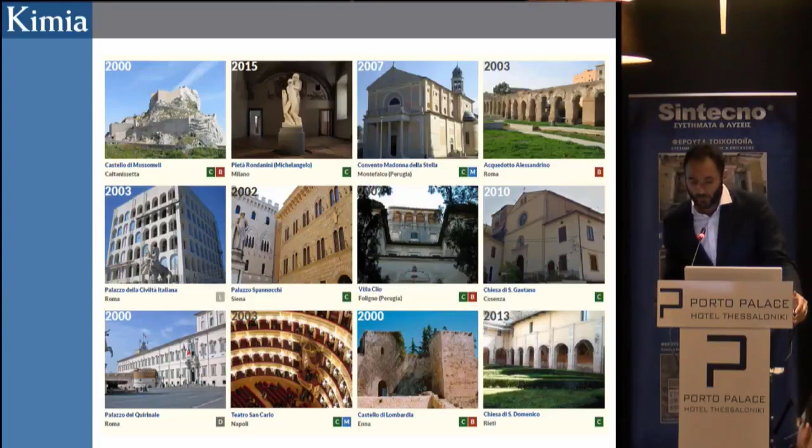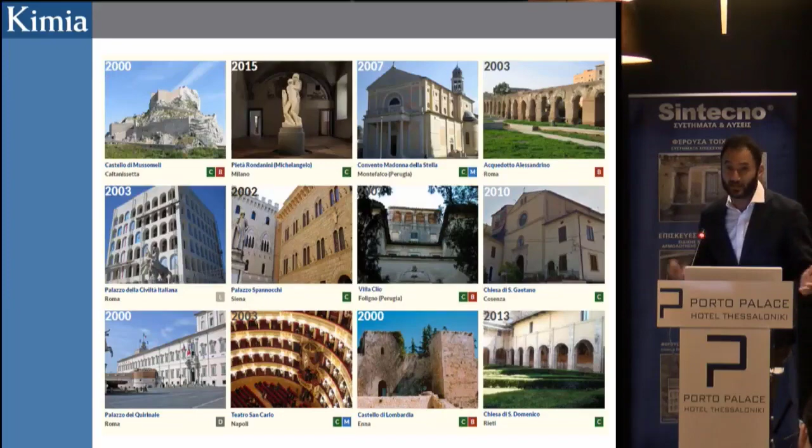So let's get started, a few words about the company. KIMIA has been founded back in 1979, and it's been specialized since the very beginning in the production of traditional and innovative materials for repair of historical monumental buildings as well as reinforced concrete structures. We have a wide range of case histories done in Italy and abroad.

As you have been already told, the main topic of my presentation is to give you an idea of practical feedback we gathered from the behavior of structures previously reinforced with different strengthening systems shown under a seismic attack. Because, as you know, in Italy, and especially in the area where our company is located, we have had plenty of earthquakes during the last decades.

So we have seen what happened with the repairs done after the earthquake which struck Italy in 1979, afterwards in 1997, and lately in 2016. We found out some interesting information about the strengthening systems applied and about the behavior of the systems applied over time.

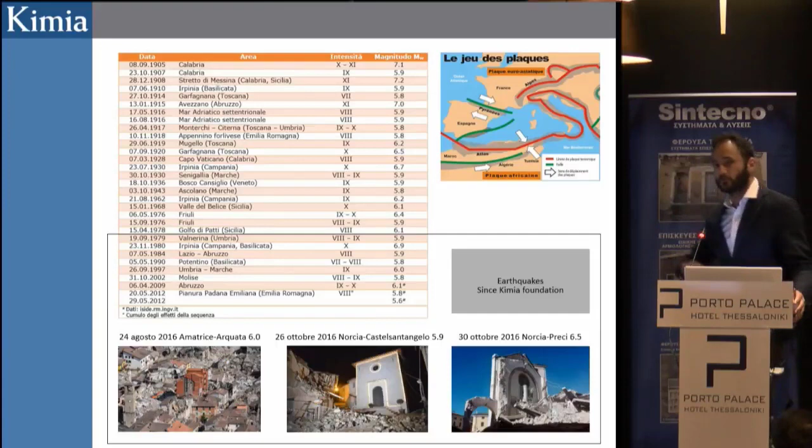Because every time we are working on retrofitting an existing building, we also have to take into account that what we are doing is not going to stand only for 5 years, but will stand in time. So we also have to take into account what will be the durability of the systems applied, and their compatibility with existing buildings over time.

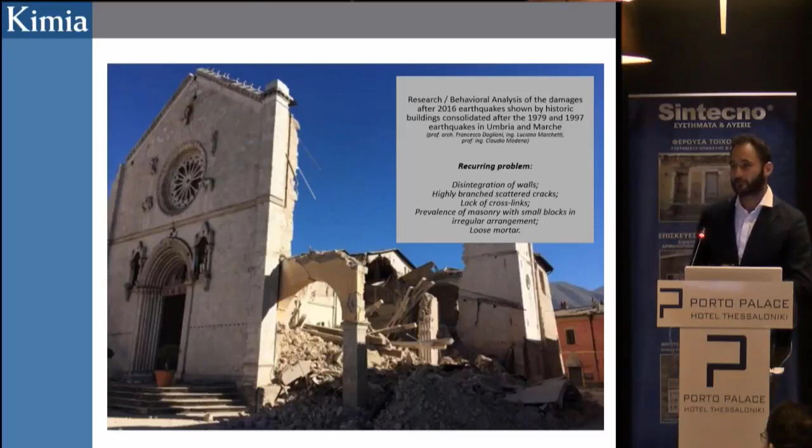After the last earthquake in 2016 in our region, we found out that there were some recurring problems, and we will go through them quickly. One typical problem we have seen has something to do with the disintegration of walls, which were actually very poor quality walls over time.

We noticed that in previous earthquakes some injections were performed, but still these walls wouldn't behave in the correct way, since, for instance, like in the bell tower of Santa Maria la Bianca ad Ancarano or in Campi in Norcia, these walls were not injectable ones. The Italian regulations were pushing a lot the use of interventions like injection for curtain walls, but if you applied these systems in walls which were not injectable, the systems applied wouldn't behave in the correct way.

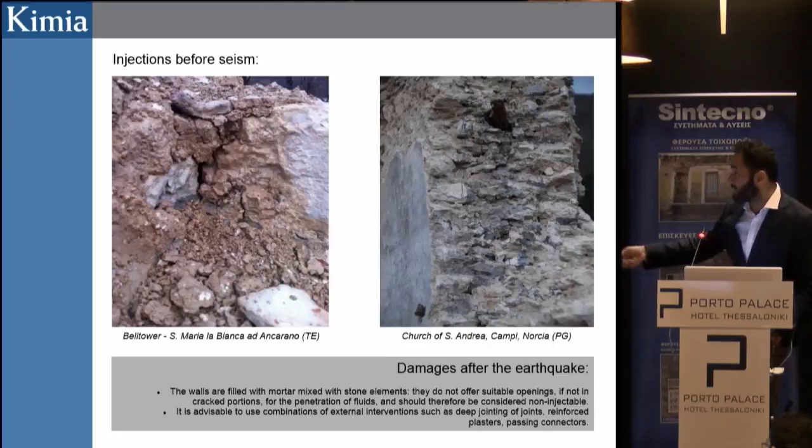In fact, you see that the injection mortar has not actually been able to fill the gaps, the voids, because the wall was not a cavity wall with interconnected cavities to be injected, so it was not injectable.

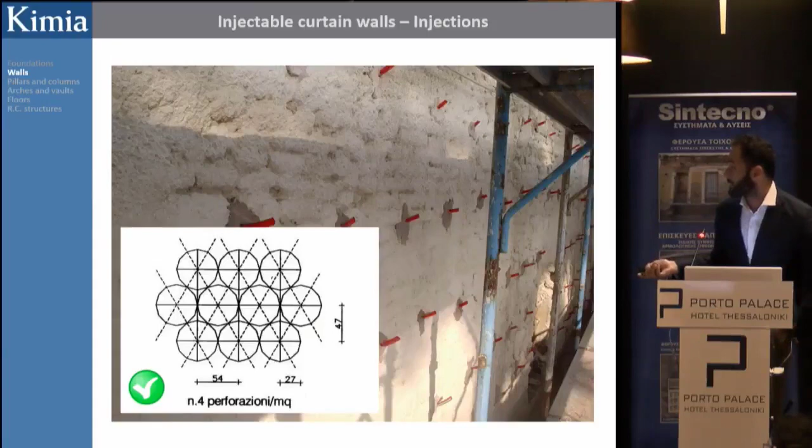The issue we had in Italy over time is that after earthquakes which struck Italy in 1979, for instance, injections were typically done also with cement slurries. And this resulted in chemical reaction with the original materials.

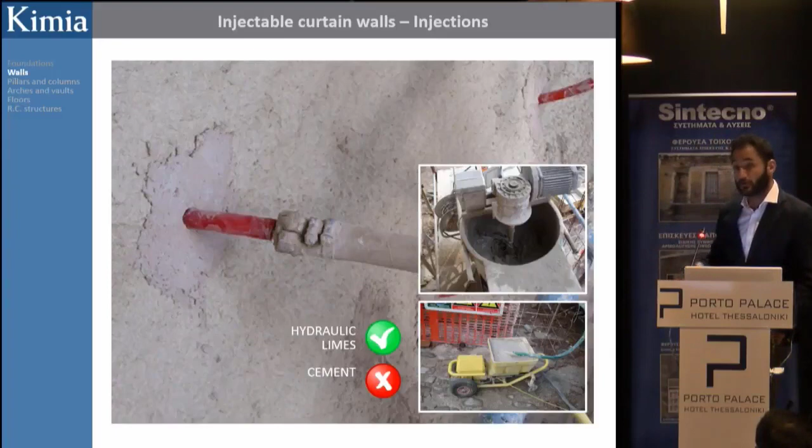So, okay, we have a problem, because if we decide to make an injection, for instance, we have to make sure that the walls we are injecting are injectable. But we also have a problem, that is to say, what is the chemical nature of the material we are using? Is that correct? Will it be able to guarantee, in time, the chemical compatibility with existing materials?

The results after many years of application, and sometimes of injection with wrong materials, were that often the cement-based slurries would react with gypsum originally contained in the walls to create materials like ettringite and thaumasite, which would have no actual strength and which would damage the original walls instead of increasing their resistance.

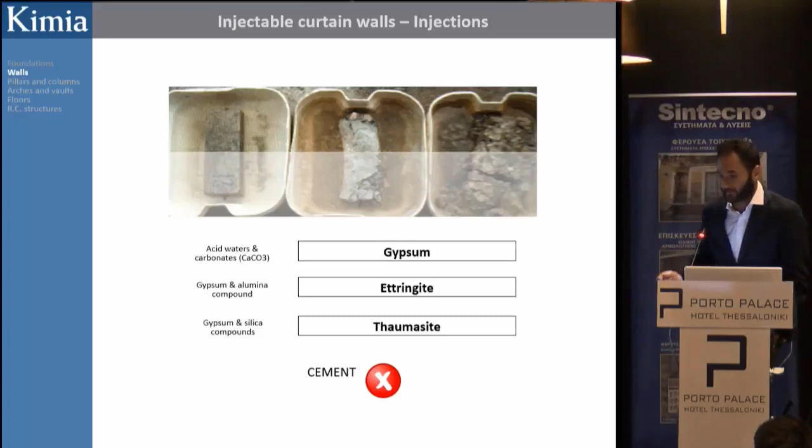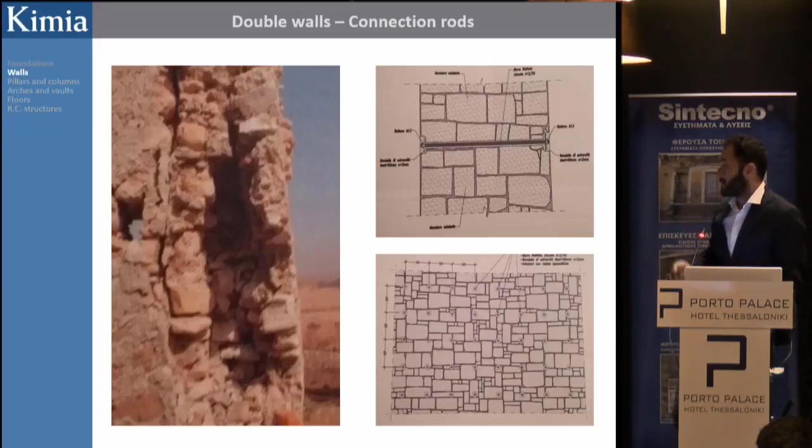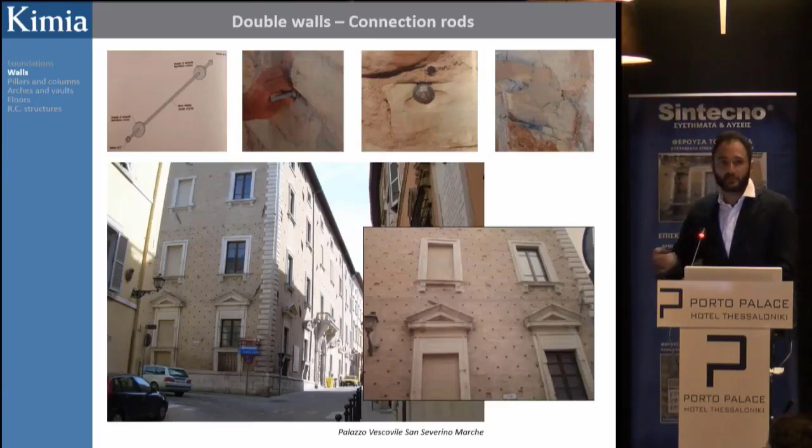Many problems are also related to the lack of connection in case of cavity walls, which have only two faces that are often not very well connected. Applying connections in case of cavity walls resulted in bettering a lot the behavior of the original masonry, and this is something we have experimented after recent earthquakes.

One intervention which proved to be very effective in increasing the overall behavior of masonry is repointing. You see a couple of buildings: one has been very well repointed after the 1997 earthquake, and the other has not been repointed. A good repointing is an effective way to at least make so that the masonry won't explode, but will instead activate the typical standard damage mechanisms of collapse, and not the explosion.

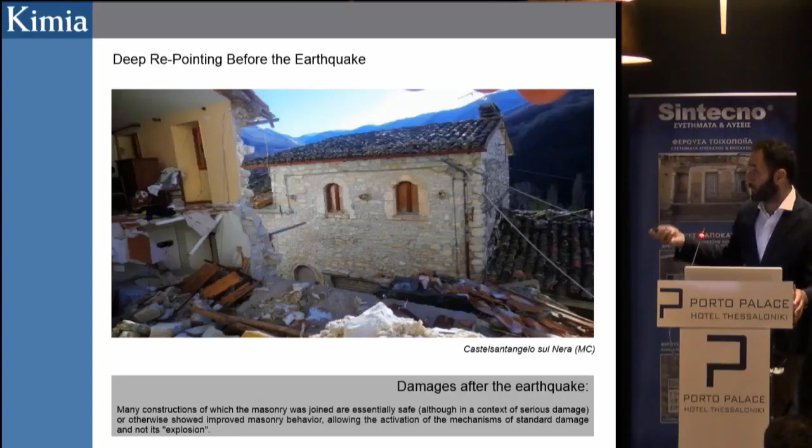So here you see an example, a direct comparison between deep repointed and non-repointed masonry. Of course they were different buildings, but this is something we now consider very important in order to increase the original resistance of the masonry mortars.

But another problem arises. Let's say it's very important that we deep repoint the walls so the overall behavior is the best possible. What material am I using? In the past, sometimes the idea was the stronger the better, so I would use a cement-based mortar, which is maybe the strongest product, with the idea of increasing a lot the original resistance of the walls.

But some problems arose. If I use a cement-based mortar, I have a problem with chemical compatibility, as we've seen so far, but also cement-based mortars are less permeable to water than natural hydraulic lime-based mortars. This results in water standing more in the repointed areas in case of a cement-based mortar, and freeze-thaw cycles will damage the bricks or stones instead of damaging the mortar.

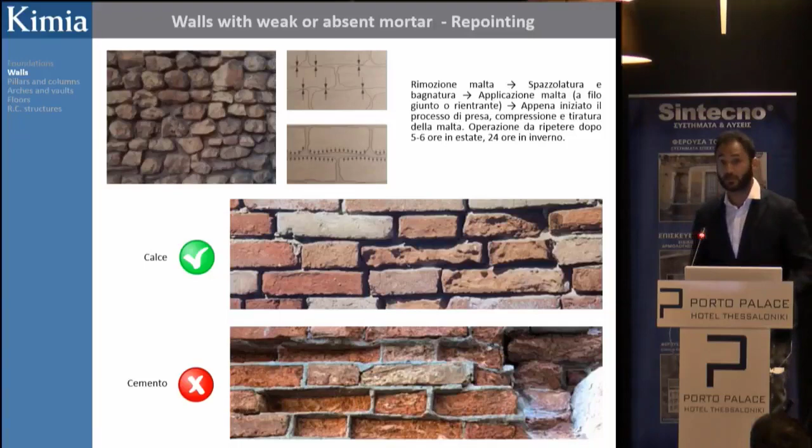Plasters without previous deep repointing, like in this private house in Visso, showed very poor behavior under seismic attack. Mostly, without the deep repointing, applying a plaster over an existing historical low-quality wall results in no structural strengthening and in detachments of the new plaster very easily.

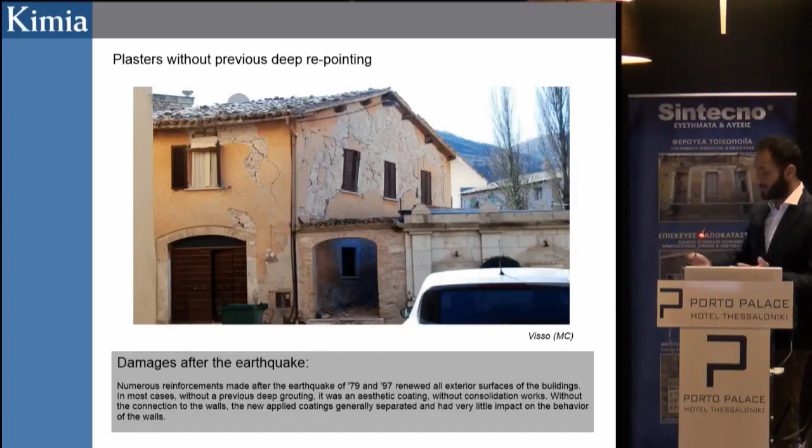An alternative option is collaborative plasters, reinforced with nets and connected to the substrates. Again, in the past the idea was the stronger the better, so some cement-based plasters were used. We obviously understood that increasing the stiffness with a plaster that could sometimes not be very well connected to the original masonry wasn't a good idea.

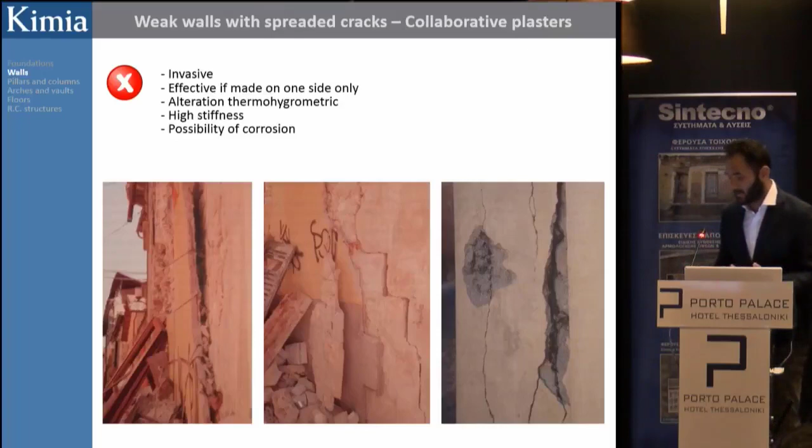In any case, problems would arise because the steel meshes tend to corrode over time. So nowadays we are developing second generation collaborative plasters based on alkali-resistant glass fibers. We have no problem with corrosion as happened with previous collaborative plasters, applied with natural hydraulic lime-based mortars, overcoming the issues of chemical compatibility, stiffness, etc. that we discussed with cement-based plasters.

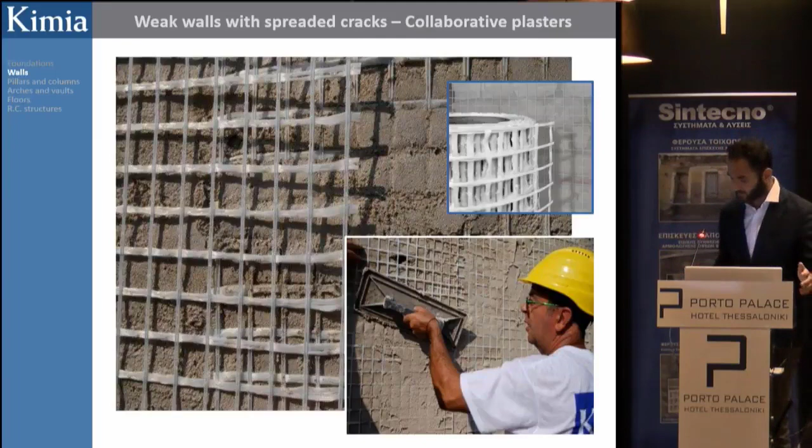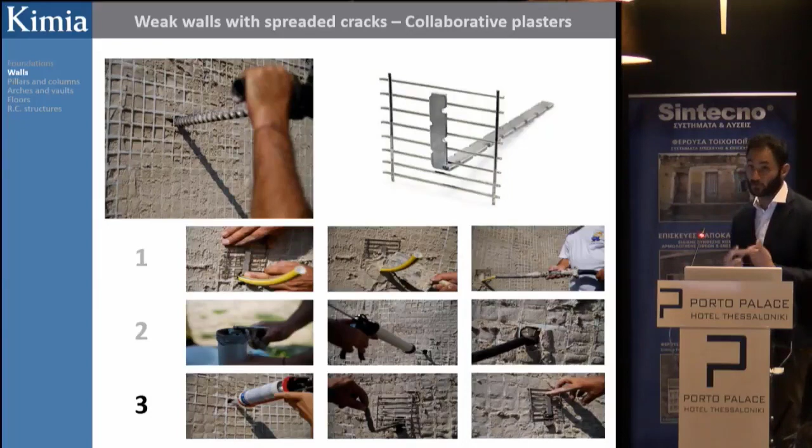This is a system we are now testing and certifying in terms of design procedure and certification of systems. Italy is moving in this direction.

Other typical problems we found over the last few earthquakes: sometimes people didn't like to see tirants securing the horizontal behavior of arches. We have two examples, two different churches, San Martino de Gualdesi and San Pietro a Vallinfante. In the first case they got rid of the tirants and the structure had major failures, while in the other church, with similar construction, geometry and situation, the tirants were still there and they had no problems over time.

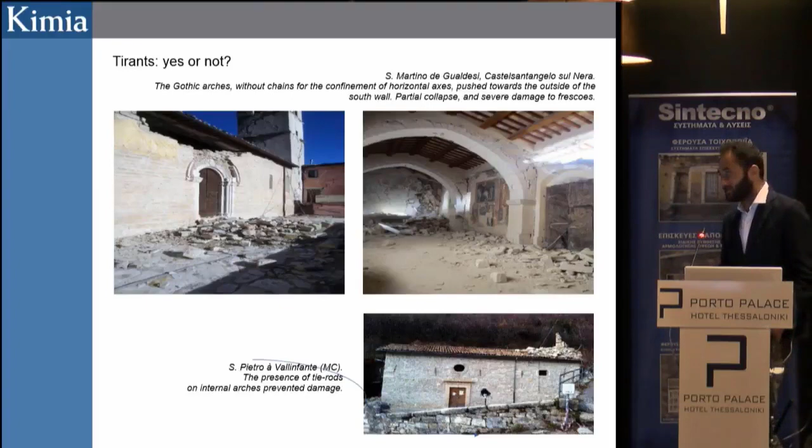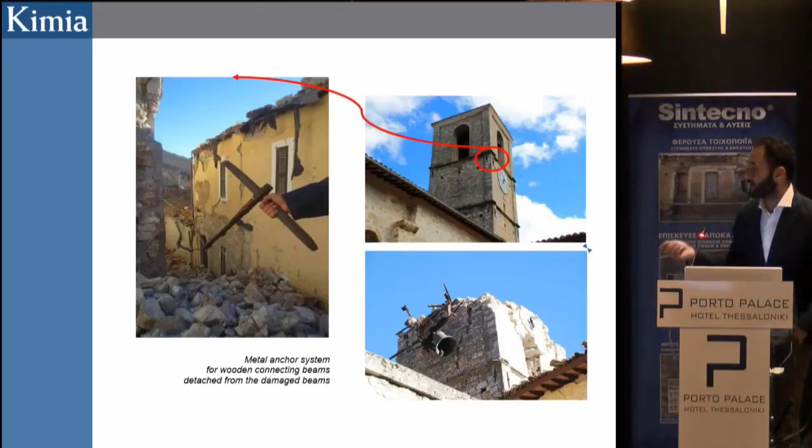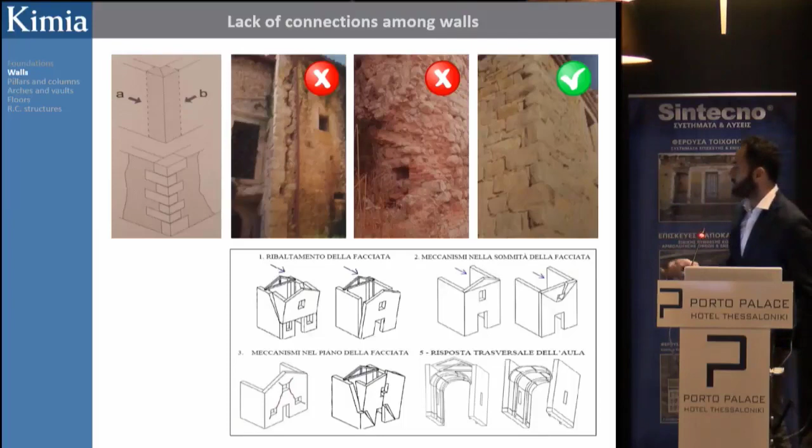Sometimes we got rid of structural systems only because they were old or not fashionable, but we didn't replace them with more effective systems, and this worsened the behavior of the original building. Sometimes they kept the structural systems meant to retain the walls from collapsing, like in this case, but they didn't check the status of the wooden trusses actually avoiding the tower from opening. They found the wood was completely faded, and the metallic anchors visible from outside were completely detached from the faded wooden beam. So lack of connection is a big issue because of the local movements allowed in case of earthquakes.

What we did in previous interventions after the earthquakes that struck Italy in the late 70s and early 80s was, for instance, to secure the connection by applying ring beams at the level of the floors or roofs, which were sometimes built by destroying part of the masonry. So the system would, in a subsequent earthquake, behave like this.

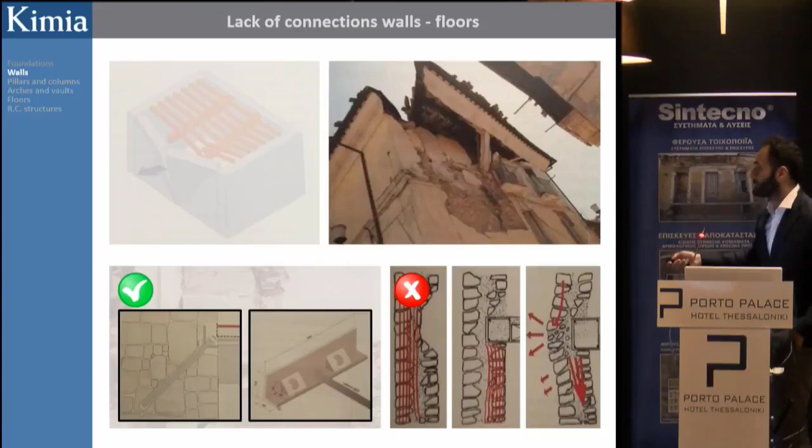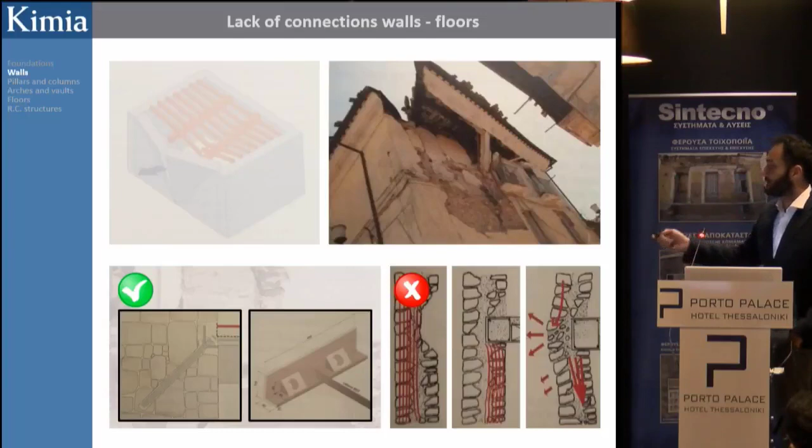We have a very rigid, stiff system, and the walls have been weakened to make room for these new beams, and a lot of collapses are connected with this kind of structural device. Some options may come to help, and have been applied prior to the last earthquakes, proving even during earthquakes to behave in an interesting way.

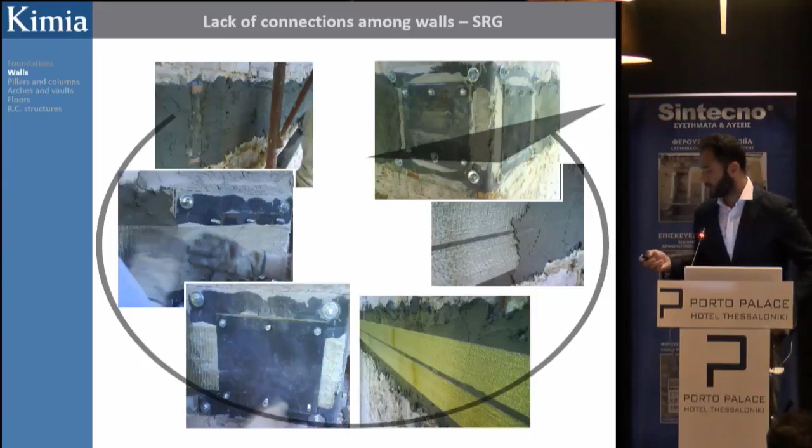For instance, SRG, steel reinforced grout. These are second generation composite systems which, instead of using carbon fibers and resins, use as the tensile phase metallic fibers, galvanized or stainless steel, applied together with mortars. So we don't use epoxies for this kind of application. This can be applied to replace ring beams in order to avoid collapse of walls out of their plane, and these solutions can help in case of lack of connection between walls and roofs.

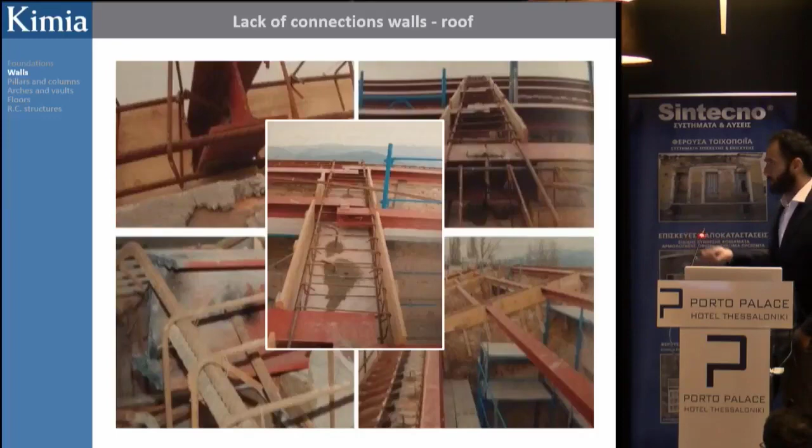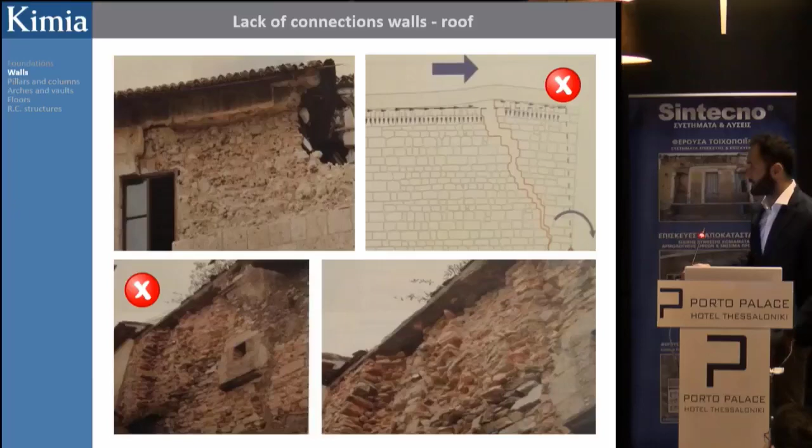These systems, in many occasions, also in the last earthquake, proved not to be effective. Here you can see the steel rebars meant to connect the reinforced concrete ring beams to the existing walls, and you see nothing good over there.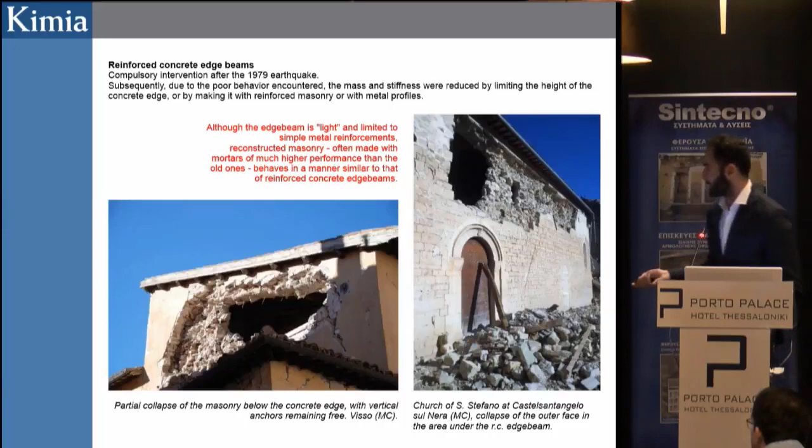An alternative solution could be the use of a composite material built up by joining together the wall, the bricks, the masonry, and reinforcing it using SRG systems, so as to create a material which, as in concrete where we couple a material resisting compression with rebars for tension to gain flexural resistance, joins the bricks - which withstand compression - with steel fibers withstanding tension, creating a beam with flexural resistance but less stiffness than a reinforced concrete ring beam, with fewer problems in terms of connection with existing walls.

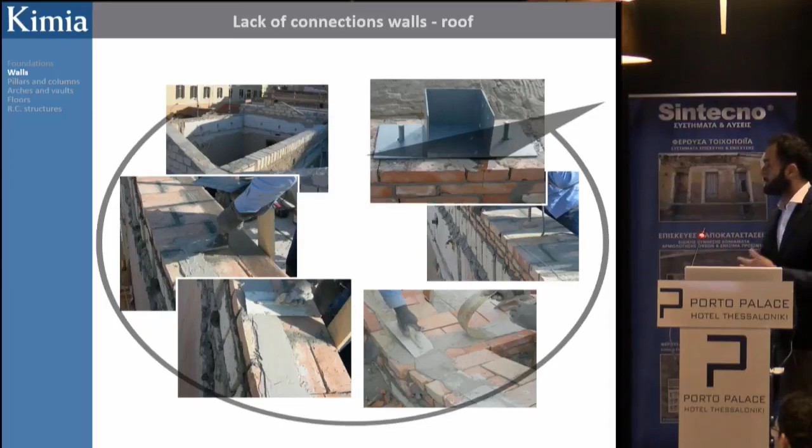Of compatibility, mechanical and physical, with the existing building. This proved to be a very interesting option to solve problems that in the past we used to solve with different, more stiff and less compatible solutions.